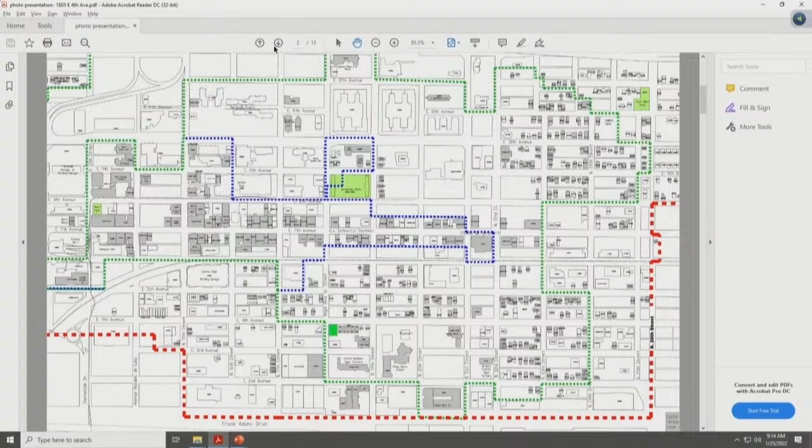Looking from above, you see the context and fabric currently there today. Just to the south is a project that's already been approved; this is kind of an amendment to what has already been approved. The subject site, once again, is on 4th Avenue and Angel Oliva Senior Street.

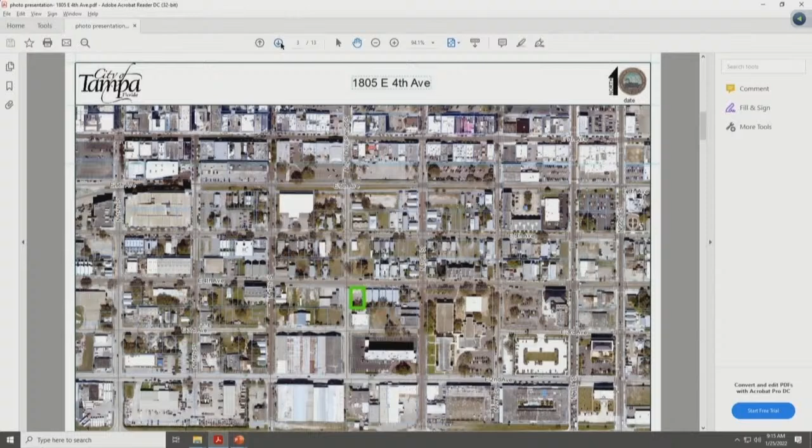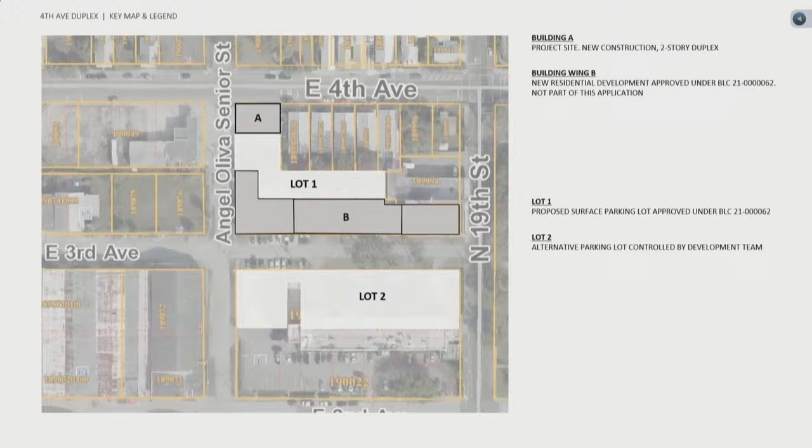Lot 1 is a proposed surface parking lot with approximately 42 parking spaces. Lot 2 is an alternate parking lot, also controlled by the development team, currently under review for a design exception, so that we are meeting our 1-to-1 parking ratios for both projects.

Here's a closer look at the development in relationship to the project that was presented last year, so you can see the relationship with that building.

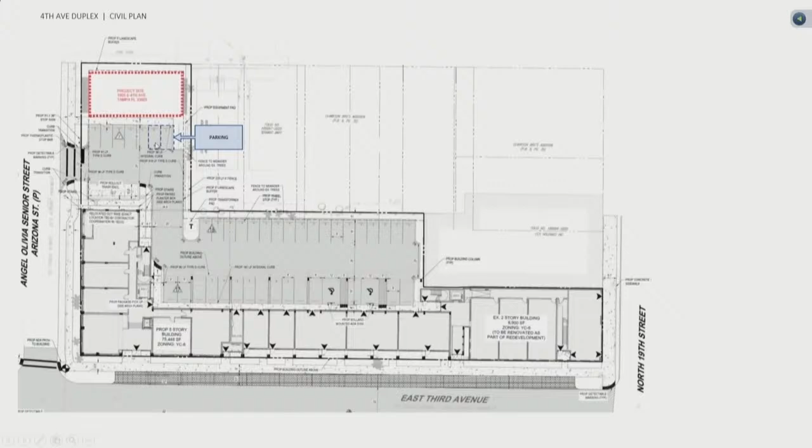We will have, as I said, a duplex, so we'll have dedicated parking, 2 parking spots for our duplex right at that location shown on the slide.

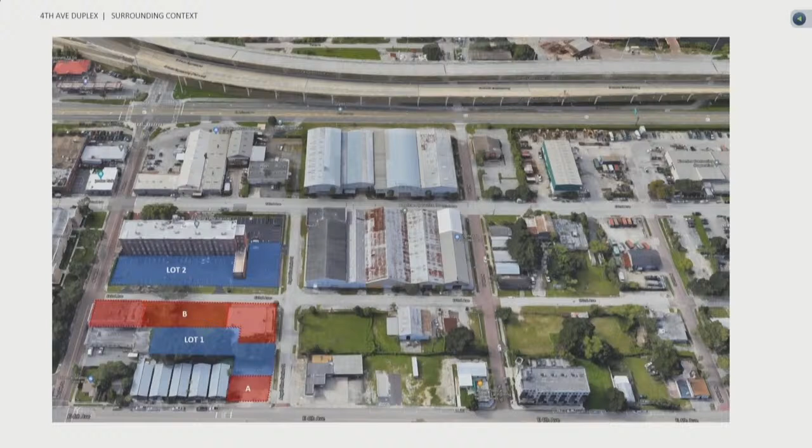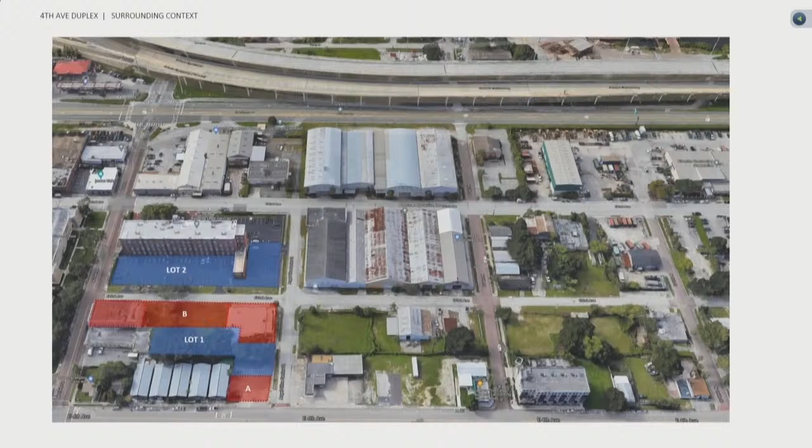Here's just a quick aerial to show the transition of scale and typologies as we move closer to 3rd Avenue. You see Building B is going to be a 5-story building. It relates to the massing already along that 3rd Avenue corridor. As we move closer to 4th Avenue, the scale starts getting reduced to a more residential scale, which is the approach we'll be taking with this project.

Here's another quick look in relationship to the buildings to the east. Our footprint is almost exactly the same as those duplexes to the east.

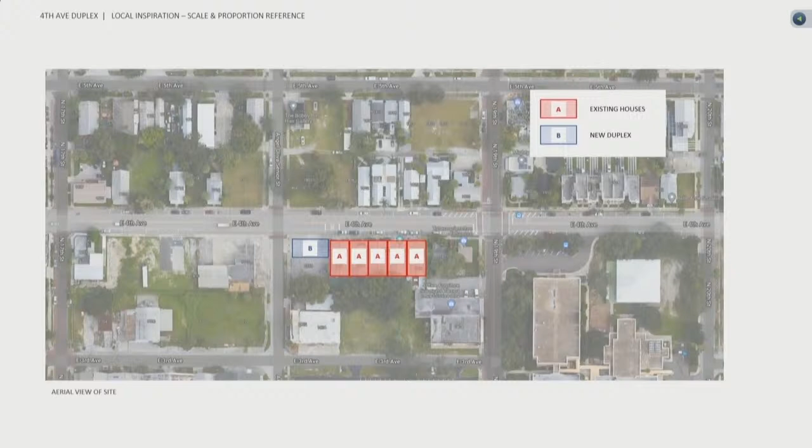We're using as reference, really our main driver for the design, the historical casitas, the cigar factory workers' houses. We're not replicating this, since we have a two-story structure, but we're definitely taking some strong cues from that historical reference, including a front porch condition, again to really activate the pedestrian experience along 4th Avenue, which is developing quite nicely.

Also along 4th Avenue, we've added two relatively new projects. At the bottom of the screen is another multifamily project just west of our property, and to the right is another townhouse project kind of catty-corner right across from our site. Although the front of that project is at a lower scale, as you move back it actually maximizes the height allowed on that street.

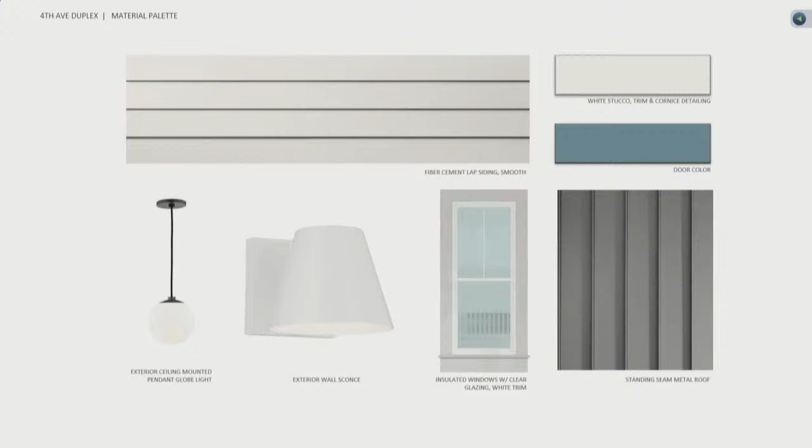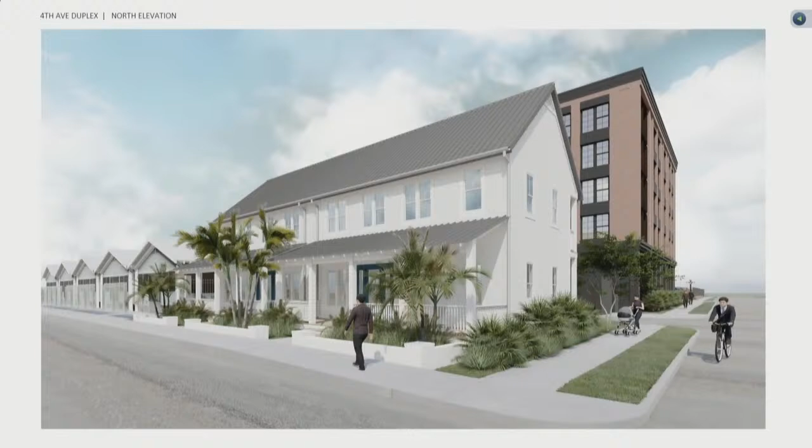And now, just renderings of what we're envisioning this project to look like. This is a view looking back at the north facade.

We're proposing to have a very low knee wall at the front to kind of differentiate the front yard. This is, again, taking cues from what is historically seen around the neighborhood.

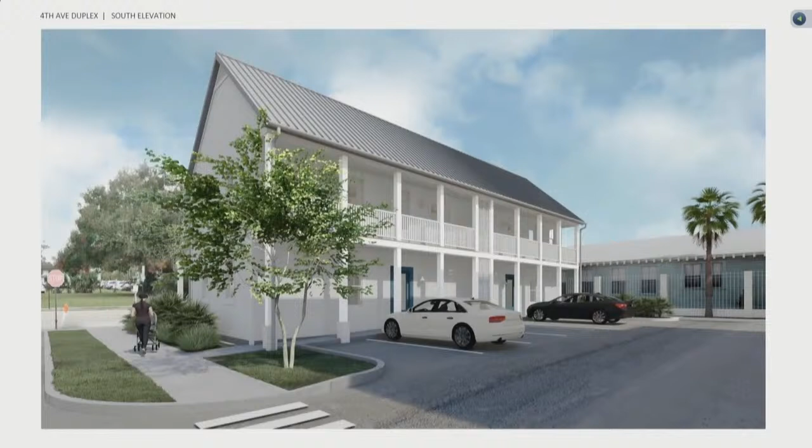Here's that rear facade. You see how, as you're walking up Angel Oliva, you really get an experience. You really get to experience that facade.

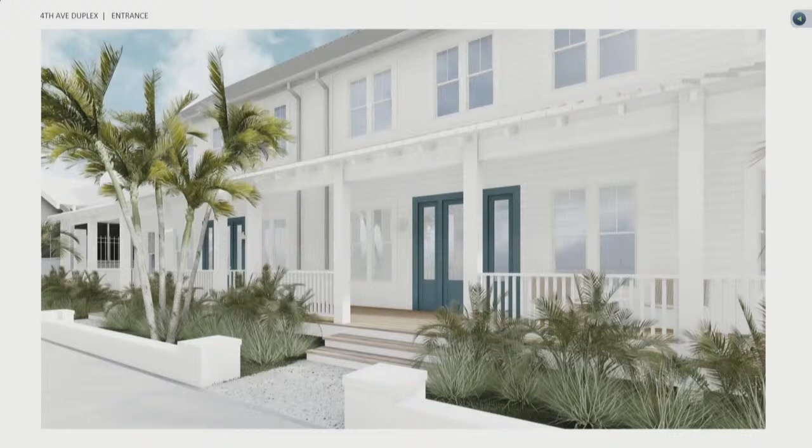There's a closer look at the front entry. We're proposing to use a shellcrete material for the entry slab as you enter into the property, to create a differentiation between the materials on the sidewalk and the materials used to enter the building.

And here's a closer look at just the experience at that front porch looking back at Fourth Avenue. And that concludes my presentation to you guys today. If there's any questions?

Good morning, Commissioners. Ron Avila, staff with Historic Preservation. The request this morning is for a certificate of appropriateness for new construction for the duplex with some site improvements.

Staff finds that this application is consistent with the Ybor City Design Guidelines, with plans that we reviewed on January 2nd. On the plans that we reviewed, there seems to be some changes illustrated this morning, but to briefly go through the conditions I had previously that are reflected on your staff report.

Additional information should be provided for elevation from grade to show consistency with the existing block, the historic fabric, and the setbacks.

Initially, the depth of the porches were not sensitive to the environment. I believe he's increased the depth of the porches, and he could illustrate the dimensions of the porches currently. The parking solution has been satisfied.

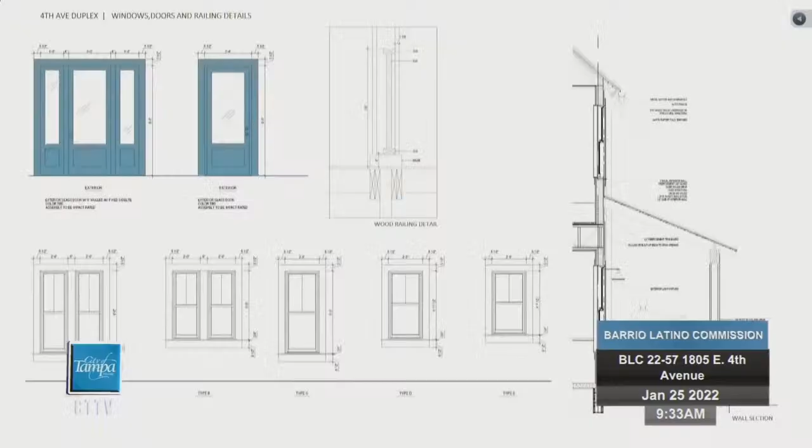One of my observations is that in the presentation, you took the orientation of the building facing west and used that roof pitch to site the building, then provided the porches off of the side that they weren't ever historically on. I was just trying to figure out if there's enough room to wrap a porch around that north-south road, similar to what you're referring to at the dog park, but it looks like you're really pressed for space there, because you've taken the entries and made them on the side of the building that wouldn't have normally had entries, right?

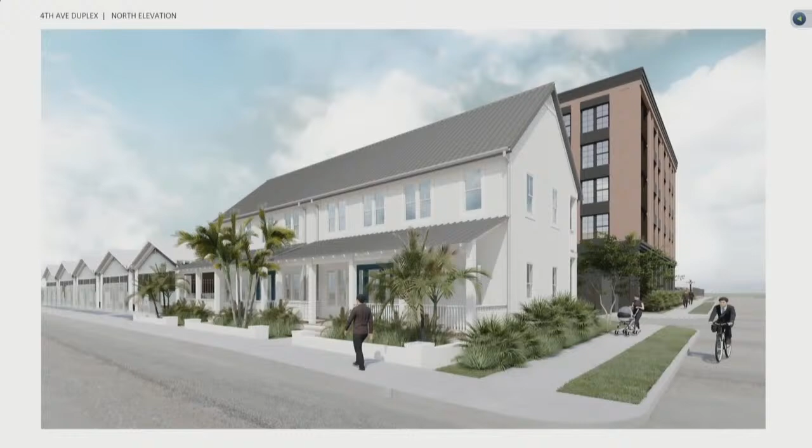No, they're the same, just the perspective view. Yeah, when you look at them in perspective versus elevation. Okay, oh sorry, not quite as different as I kind of thought. All right, so maybe I don't have any questions on the windows as much then.

But let's see, maybe come back to me then as well. I don't think I have much else. All right, so to follow up on Levy's comment about the windows, the proportions have certainly changed since the preliminary package that we saw. The double windows seem a little bit more appropriate for their scale and their massing here.

Can you talk about why we changed our rhythm here? Like on the front facade, you've got a single, it's a 1-2-2-2, and then mirrored back. I don't know if I see that being necessary - is there a distinct reason for doing that?

I don't know, it's really how the program is shaping out, so it's a direct response to what's happening inside the building, to how the floor plan is being laid out. If you look at the second level floor plan, we do have a walk-in closet in that corner. Originally we did have the same windows throughout the entire facade, but it's just how the program worked out - we couldn't properly fit the double windows at the corner.

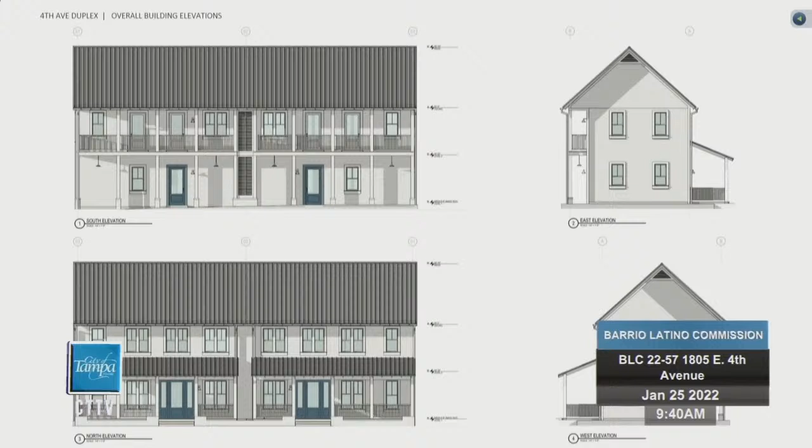So we switched back to a single window, which we thought was appropriate since as the building turns that corner, you're also going back to a single window on the west facade as well. So we placed most of the focus on trying to keep the facade as symmetrical - you see here on the west, as it turns, it goes back to a single window rather than a double window. Okay, yeah, I think that's a big improvement from the preliminaries.

I mean, I think the scale of the windows is more appropriate. I just wanted to understand if there was a particular reason for changing this, but I think it offers a nice play of the rhythm there too.

So your standing seam metal roof - Ron had mentioned that 1 inch is typically more historically compatible. Is that a 1 inch standing seam? Yeah, we didn't specifically call out what we're doing here, but we'll make sure it matches what's historically compatible here.

So the same thing goes with the sill of the windows - we'll make sure to work with Ron to adjust that to the appropriate size as well. And what are your roof slopes here? So we have a slope.

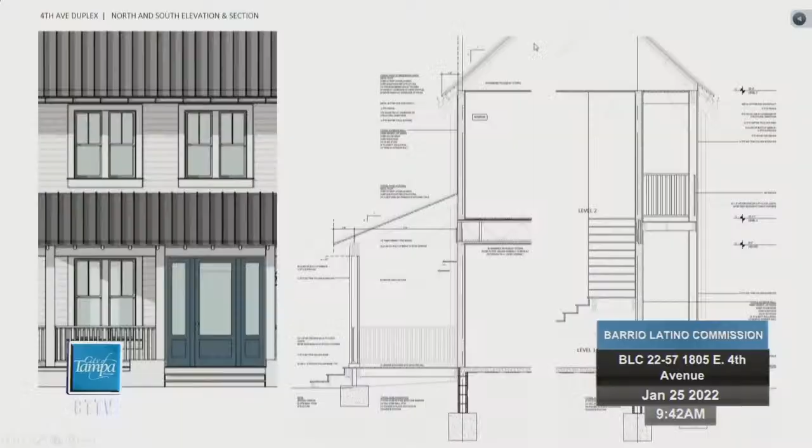It is... sorry, yeah, it's can't really see that. It's pixelated.

Yeah. And let's talk about, it looks like a stair behind on the rear elevation between the two units. What is that? This louver, it's just a louver system. Is it wood, metal? It's a wood louver system.

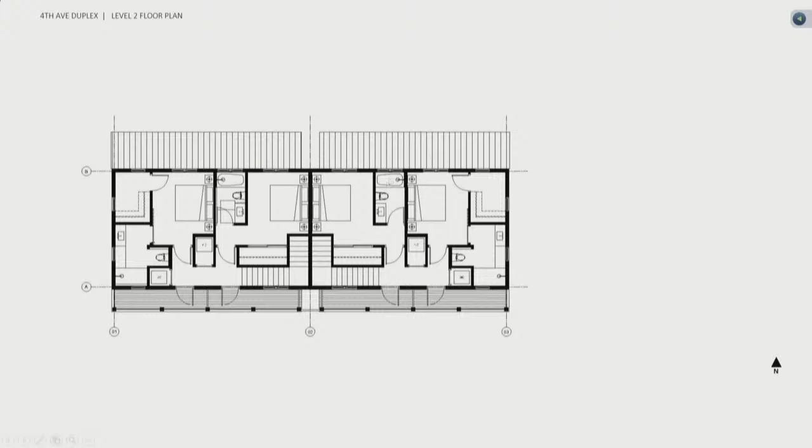Like a Bermuda shutter kind of thing? No, it'll be fixed. If you look at the second floor plan, the balconies at the second floor are also separated, so it just helps as a detail to break the length of the facade on that side. We wanted to add a detail that still allowed for breeze to come through, but somehow differentiated where the units were kind of split.

Okay, yeah, I think that's appropriate. I think these elevations have gotten better than the preliminaries that we saw. The roof mass seems rather large, and that's on Fourth Avenue. I understand the design decisions you made to rotate the building and optimize the views, and I think that's a good decision there. Was there any conversation or discussion about breaking up the continuous mass of that roof? Maybe dormers or a break?

Yeah, we definitely explored that. The first thing we tried was splitting the roof, actually creating a separation at the middle, and that really threw off the scale of the mass. It became more like two squares, which is not... we really didn't see anything that kind of related to that in the district.

We also looked along Fourth Avenue and didn't notice any buildings with dormers along Fourth, so that's another thing. And we also didn't really want to add dormers that weren't functional. So we did look at an option where we could inhabit that third floor, but again, the space inside the building didn't allow for a stair. So we explored that extensively.

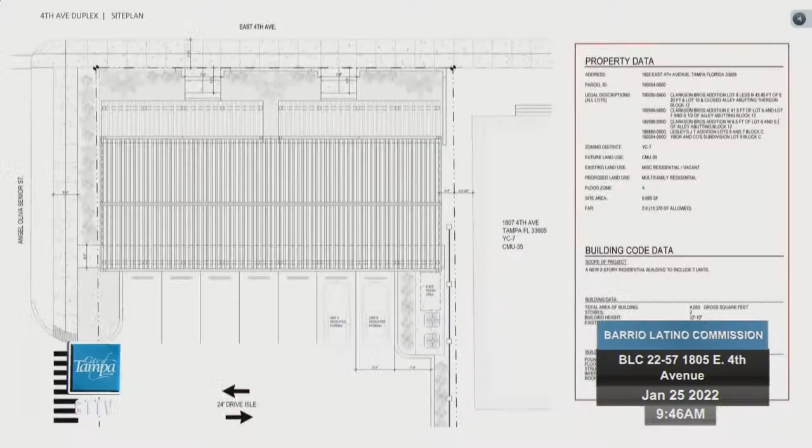What's the total length of that roof length? So the building length, I'm not sure, actually, I have a slide here for that. Ballpark? Oh, here it is, 69 feet. 70 feet, yeah, with overhangs.

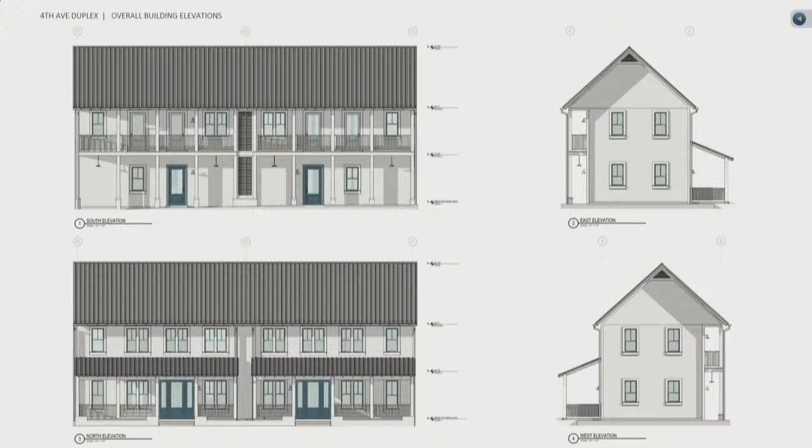Okay. Could you talk about the elevations, maybe the wall section, your front entry stoop there? How are you detailing that? Is there an approach coming down to the sidewalk? Is it a transition, or is it just kind of everything's on the building? But yeah, your wall sections are probably...

So actually, I think this shows a knee wall out front. Yeah, so we have a low knee wall at the front. I would say it's like 16 inches. The corners are pronounced. We're capping them with a concrete cap. And the steps transition outside of the building as well.

I don't know, is that the question? Was that the question? Yeah, that answered it generally. This is a good view, better than the sections, to see how that works, and I think that's an appropriate solution there.

So from this rendering, I'm seeing exposed rafter tails for the low roof, the porch. Are those appear to be exposed underneath the porch as well, but nothing exposed on the eave for the main roof? Correct. Actually, let's see if we have a good view of that. Let's go to this section.

We will have a fascia board at the eave of the roof, and they really won't be exposed at the eave since we have a very small eave at the top. So you're correct, they will be exposed at the lower roof, but not at the top.

It's just that they become kind of pixelated, so it's hard to even see that going across there. At the back, we will have a ceiling over that balcony. And the gutters are a 6-inch half round, galvanized.

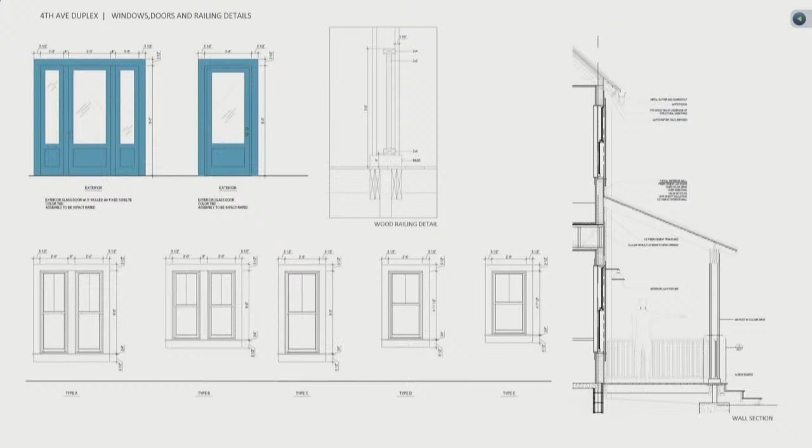Do you want to talk about your front door versus rear door? Originally we had a single door with a side light, and working with him, we figured this turned out to be a better design. So we have a 3-foot door with two side lights, just over a foot of glass, on either side. Now the rear door, since the parking's at the rear of the building, we had to also provide access at the rear just for convenience. So it's the same design as the front door, minus the side lights. If we go back to the floor plan...

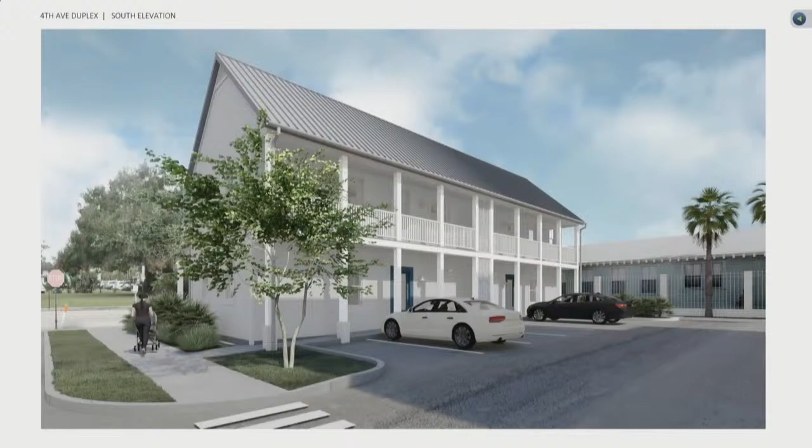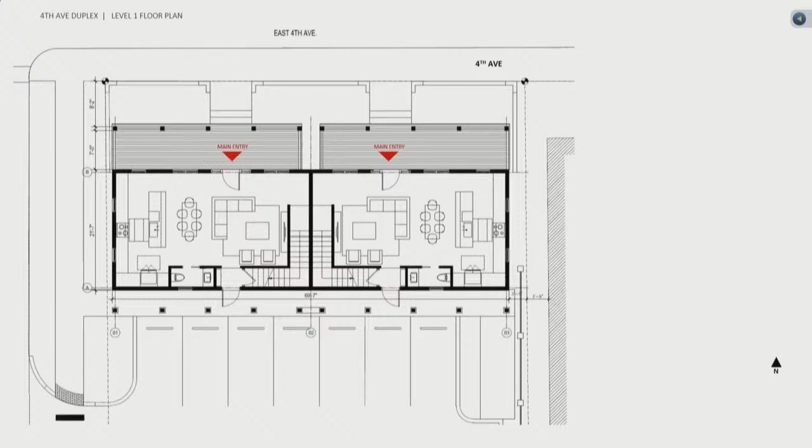Sorry, jumping back and forth here. So you have, and there's a little bit of an elevation change too at the rear, which is surprising for Florida. So we do have a little bit of a step that happens inside the building to go up into that space. But yeah, the rear door is designed to match the front door, minus the side lights, just a straight door.

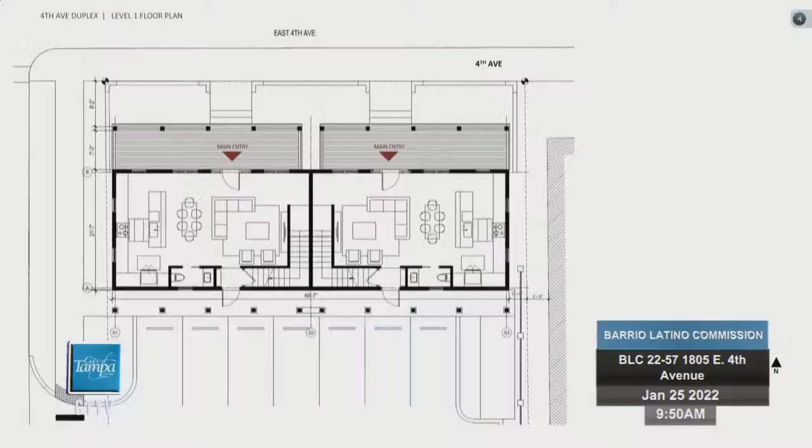We looked at introducing more windows at the rear, but really, how the program was laying out, we just couldn't find any other spots to add more windows. So you have the glass on the rear door, and a window inside the powder room, but on both sides of that you have kitchen cabinets, and on the other side you have the stairs. So it was really difficult to introduce more windows at the rear.

Could you go to the second floor plan for a second? Okay, I think your window spacing and pattern, I don't have any issues with the four windows on the east and west. I think that works really well, and I think you've made some adjustments in this presentation to the scaling and proportion of the windows, so that works very well. I don't have any other questions.

Anything else? Okay, well, I think we're done asking you questions. You have a few minutes, five minutes, for any rebuttal or summary comments on your project, on your presentation.

Thank you again for your time this morning. We're really excited about all the energy being put into this intersection, and particularly this area of the district, so we're very excited about this project as well. It's going to be a good transition into the center of the district. So again, thank you for your comments today.

Okay, with that, we're going to go ahead and close the public hearing. We can now discuss the case amongst ourselves.

Mr. Nguyen: I think it's a very nice looking project overall. I'm comfortable with having staff handle some details, like railings, standing seam heights, finalizing mullion widths and trim and all that kind of stuff. I think it will be a good looking project.

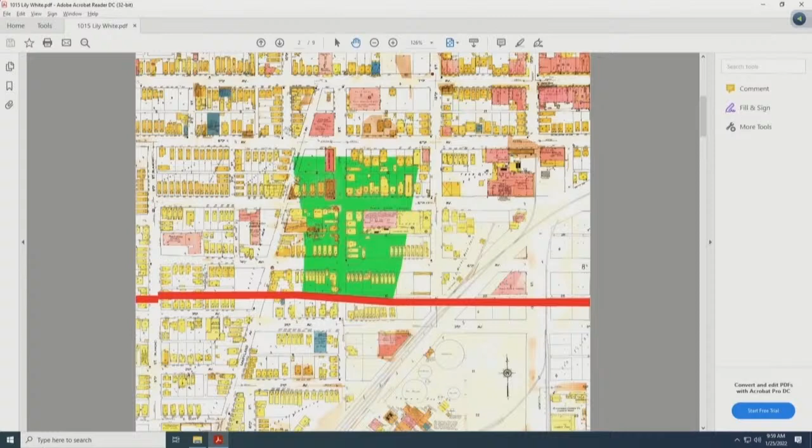This is just looking at a closer aerial of that, and this is 6th Avenue, and then it shows the fabric that was there in 1929. You see the density that was there, and it had been removed in the early 60s for the development of the projects that are there now.

Looking at the subject site, which is here, you have Lily White, and then you have Nuccio to the east. You have Scott Street to the west, as it terminates at the southern boundary of the local district.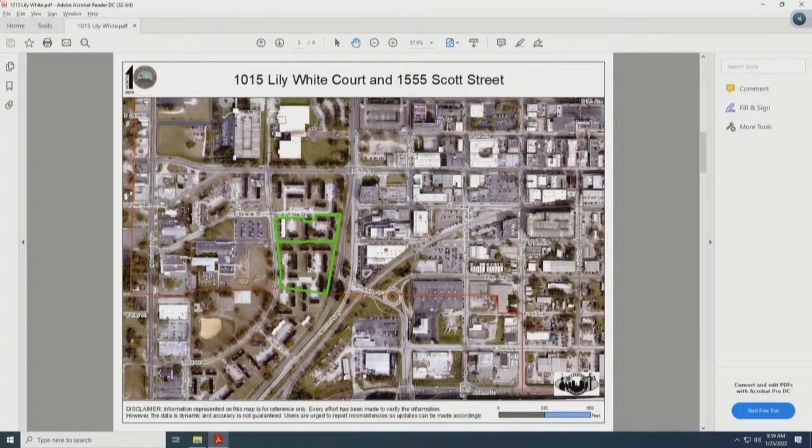Once again, looking at that subject site, just a little closer.

Moving to our vicinity map. This is a more current illustration. Here you have the series of non-contributing structures that are maintained on the subject site that will be removed as part of this request.

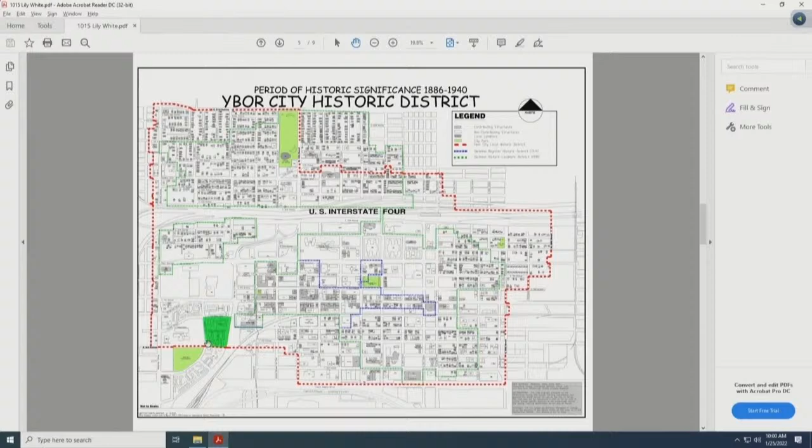And just looking at the structures that date back to 1969. There is some historic fabric in here, and that's part of the recommendation that went forward to City Council, that historic material be retained. So as they go through the process, if there's any granite curbing or bricks, it should be inventoried and discussed with staff on how that's going to be re-implemented back into the project.

And that was just additional photos of a lot more of the same. So that concludes the photo presentation at this time. Ms. Gaines will address the board.

I'd just like to make the commissioners aware that this is a preliminary approval. So staff has kind of outlined some of the required things for preliminary approval that I think are within our purview. I think we need to be very conscious of what's being looked at and approved for the preliminary, and we'll give direction for the final as well.

Good morning, everyone. Stephanie Gaines with Kurtz Gaines Hall Architects—left out a partner, Kurtz Gaines Hall Jones Architects. Michael Pilar with me, my right-hand man and everything.

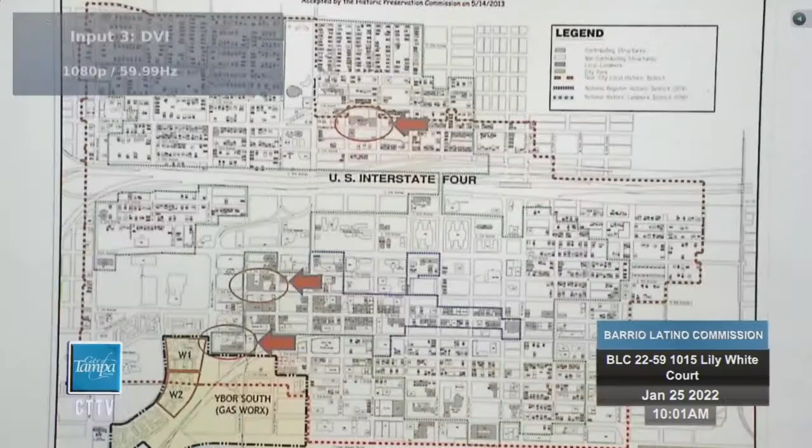I want to start by doing a little bit of orientation because there's been a lot of publicity about this project, and there's a lot of moving parts and pieces in different processes, going through different processes.

So just real quickly, this is an image from our PD package. The yellow area is generally the entire Gas Worx project, which there's been a lot of publicity about. We were here before for PD, for W1 and W2.

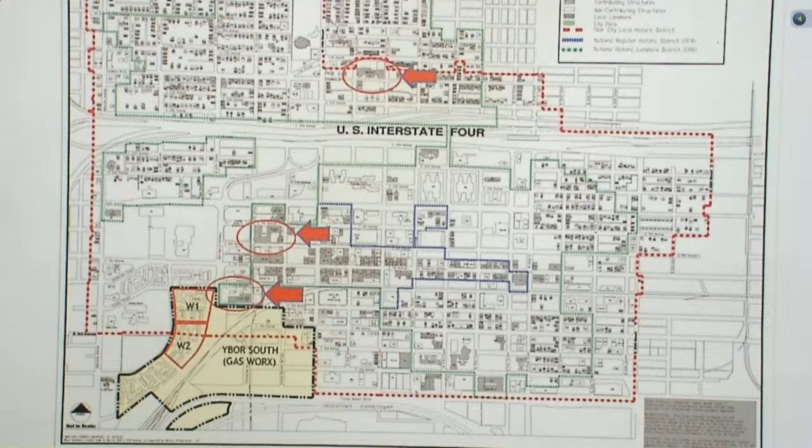We were—let me zoom into the next page. This one. This is the actual PD plan that was approved. Let's move this down. Yeah, zoom out. That's great.

The blue line—we added some lines to this PD plan—is what city council approved as the PD. The red line, the southern red line, is the historic Ybor City District boundary. And what you approved, what you reviewed and recommended, is the area that is encircled in the red line. That's the area within the historic district, so that was the portion of the PD that you approved.

And what we're here today to do is start the certificate of appropriateness review, part 4, for only one parcel, W1, which is the area shown in the black outline. There's a small portion of the southern piece, W2, that is within the district, but it's a separate project, separate timeline, separate architect, so we're just doing the northern part, in case there's some confusion as you go along.

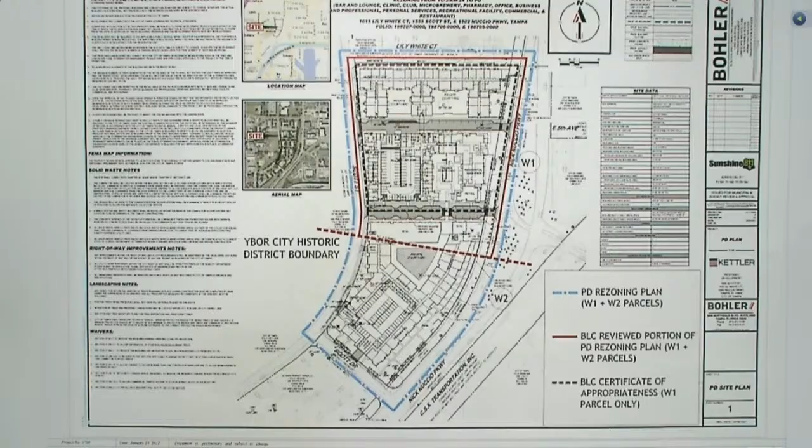So going into the enlarged site plan for those 2 blocks—it's 2 blocks because we're starting with our development—and I'm going to review this quickly because this is all part of the PD, but I'm not sure if everyone was there, and there's a lot going on, so we're going to go through it quickly.

This is the W1. We are starting with trying to mend the urban fabric by rebuilding Fifth Avenue and 4th Avenue, which align with those same roads on the east of Nick Nuccio Parkway.

We are working with the conditions that we have around the property regarding setbacks. The northern parcel is privately owned. We would hope that owner would rebuild 6th Avenue to follow suit, but there's no commitment to that. So we've shown a minimal setback there. That setback, while larger than zero, is pushed back because of a water main easement we have there—between 8 and 12 feet from that property line.

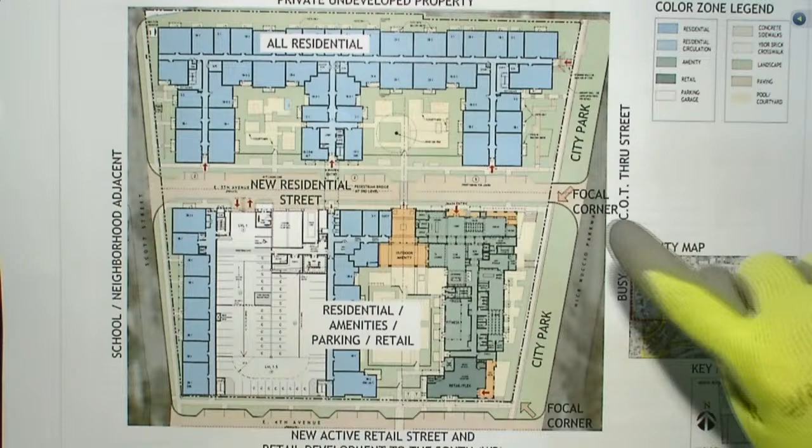We also have steps—on the north building. In order to get up to the buildings, we need some space for steps, so we've allowed for that area there.

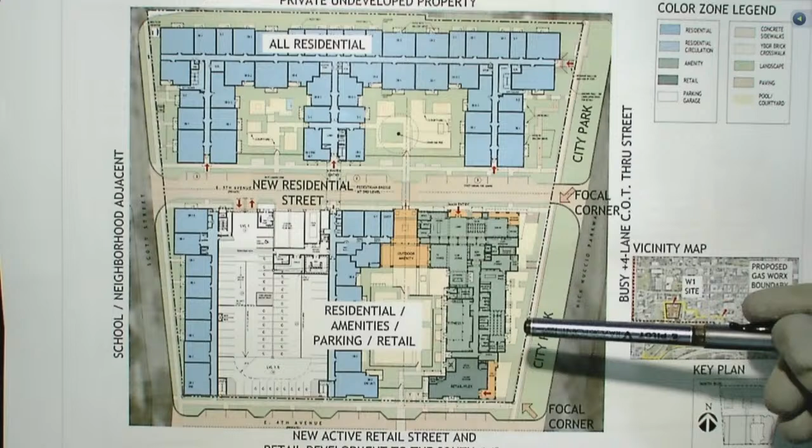And then down on the south building, we've got outdoor public areas. That dark green area is most of our amenities, our leasing office, and that sort of thing. So we've got that corner entry at the north of that south building, and the light pale areas are outdoor social areas. I'll show you something on the next page when we get to it.

Just to identify, the entire north building is residential use, and it's carved in with courtyards to create views and break down the massing. The southern building, on the first floor, has most of the semi-public amenity areas along Nick Nuccio. Then the parking for the entire project, both buildings, is flanked by more residential units on the left and the right, overlooking an interior primary courtyard.

Sticking with that Nick Nuccio area, before we get into the vertical elements, I think this is something for everybody to understand. This is a drawing by the landscape architects we're working with, Sasaki. It shows a little bit more about the uses along Nick Nuccio and that green area, leasing area there at the corner of the south building. There's a retail area at the southern end.

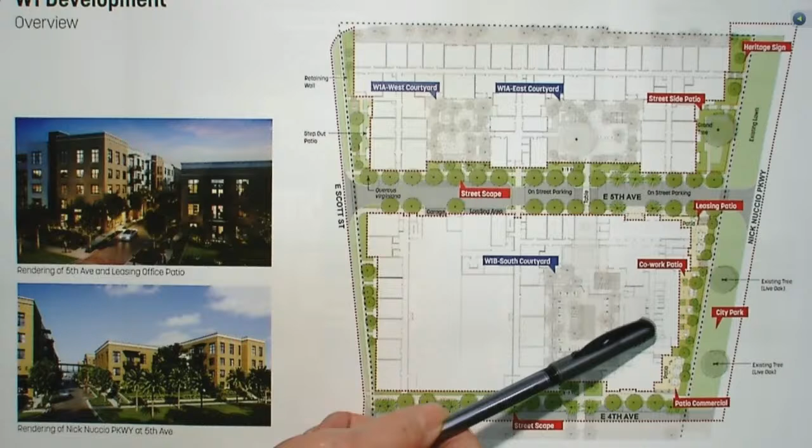So this is a public outdoor area. This area in between is social and home office areas that have spill-out patios along that area too. And then on the north, we have a little private green space around the oak tree and our entrances into that.

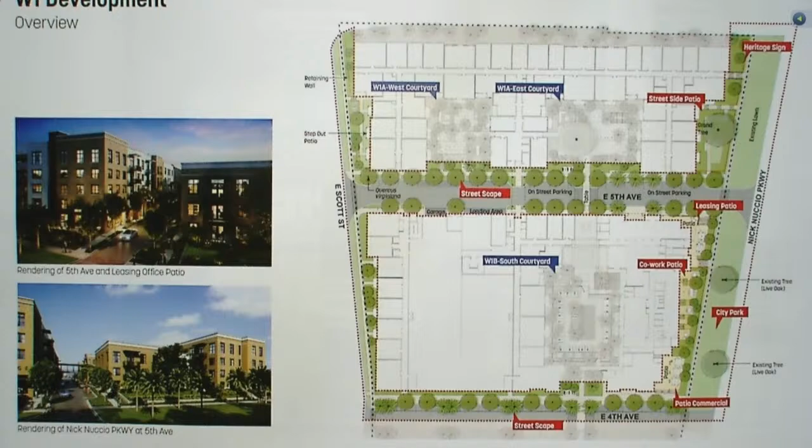You can see from the renderings, although they're pretty dark, we are starting to solve the problem of grading with low walls that can typically be found, so that we don't have a sheer 6 foot, 8 foot wall. We've started with a 2 foot low wall and then gentle grading up. There's a picture of that oak tree we're talking about, with a little bit more detail. We've kind of seen it all, but let's zip through again—this shows a little more detail of the southern piece where those outdoor areas are created.

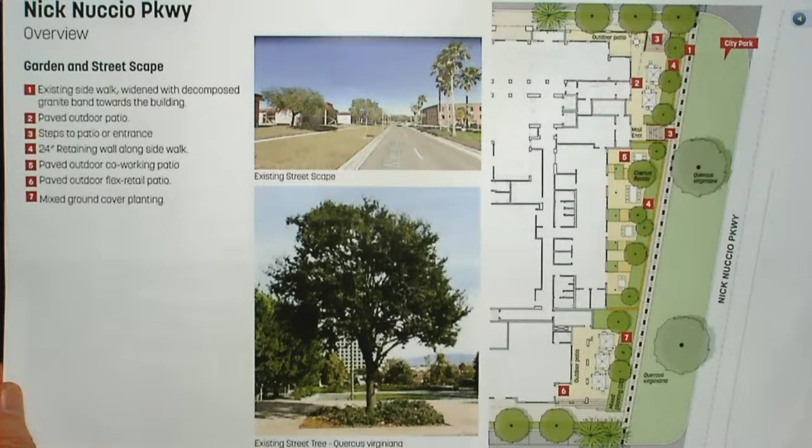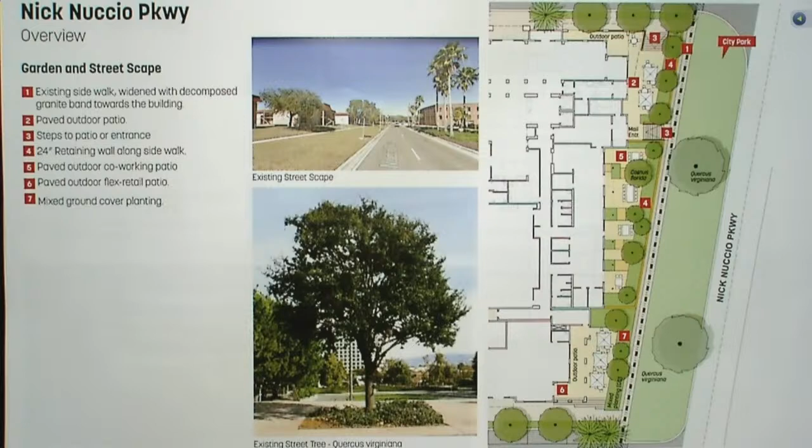This wall, a little hard to see but it is shown, continues through the north and south parcel. It creates a geometry that follows the property line and creates an edge while the building steps in and out in straight lines that we follow at an angular line. You can see in the photograph, our site is on the left, and it's hard to see that there is that much of a grade change, but across the entire property from Scott Street to Nick Nuccio is a 10-foot grade change.

This is just a little bit of detail on how we're handling that area. Sections down on the bottom, cutting through a planted area with a 24-inch wall, and then the grading up to the outdoor patios, and then a section through a typical stairway that would go up to that. The low walls—just considering some options there.

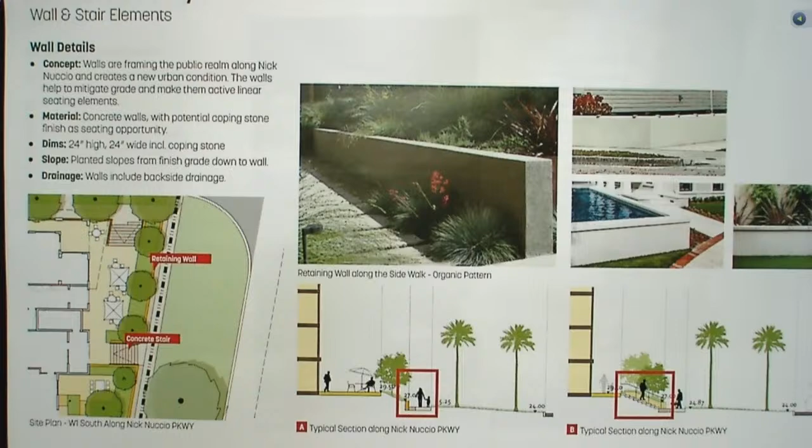These all attempt to blend that grade change so that we don't, again, look like we're sitting on a mountain.

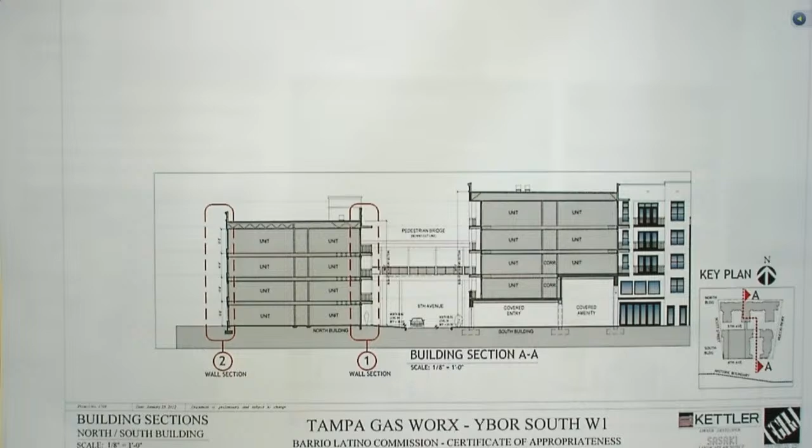Now we're going to move into the building sections and details quickly. As already mentioned, through the PD process we understand, working with staff, that a lot of the site issues have been dealt with: orientation, massing, those sorts of things, except for the conditions put on the recommendation. So the next thing for us to do is look at architectural and site details, features, specific materials and colors. That's the start of this process.

This is a section, can you see the key plan? Yeah, the key plan is there on the right bottom corner. This is a building section through the north building on the left and the south building on the right.

It shows that pedestrian bridge, which I haven't mentioned today, but that goes across that private new street, Fifth Avenue, to allow residents in the north building safe and secure access to the parking garage, which is entirely located on the southern portion of the property. So it's a 4-story building on the left, 5-story building on the south. Those open areas below are just where we've cut through the building through the outdoor amenity areas that would join into the pool on the right-hand side.

Couple more building sections. Again, the key plan down on the right. Can you zoom out a little more or pull it down? There you go. So on the upper section from the right to the left, I'll go with this.

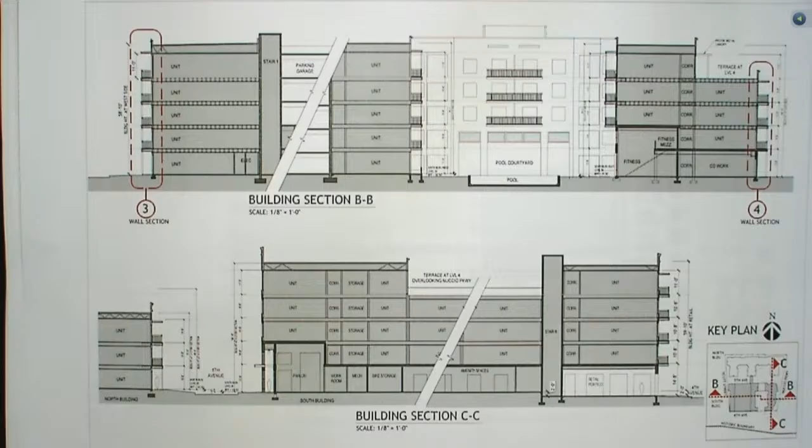Okay, why don't you put that up on the thing. Sorry, get the board and put that up. So we have a sheet with all of the building elevations on it. Sorry, just one second, and give these out to everyone.

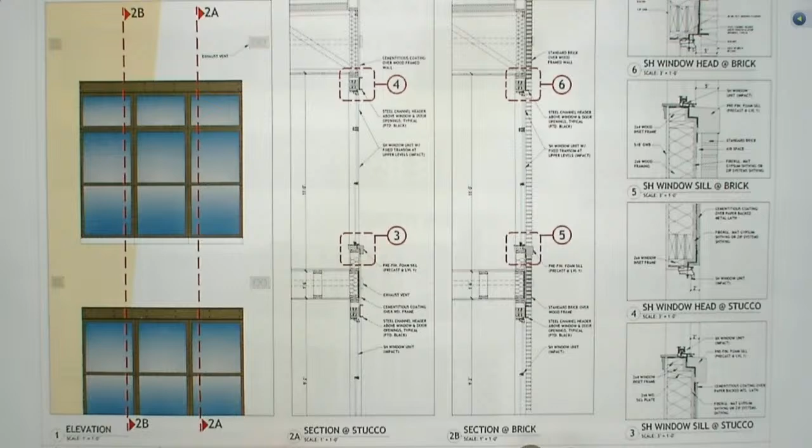So first of all, we have window details. These are typical details, with a blow-up elevation, then wall section size details to the left, one shown in stucco, one shown in brick, and enlarged details of the head and sill of both of those conditions.

It's a wood frame structure. Part of it is covered in stucco and the other part in brick, which is why we have both of those details. There are precast window sills at the first floor, and then we're using foam above the first floor where it can't be accessed or seen as well.

We've got a detail at the top windowsill and at the top of the window head, which is a C-channel steel. It's not really functional, it's just a decorative piece, but it's carried from elements we find in Ybor on some of the more modern buildings.

Do you have the other board we can put up with those? Without showing you all these individually, you can get the other easel maybe and do it over here. Michael, just put it over there so they can have both up.

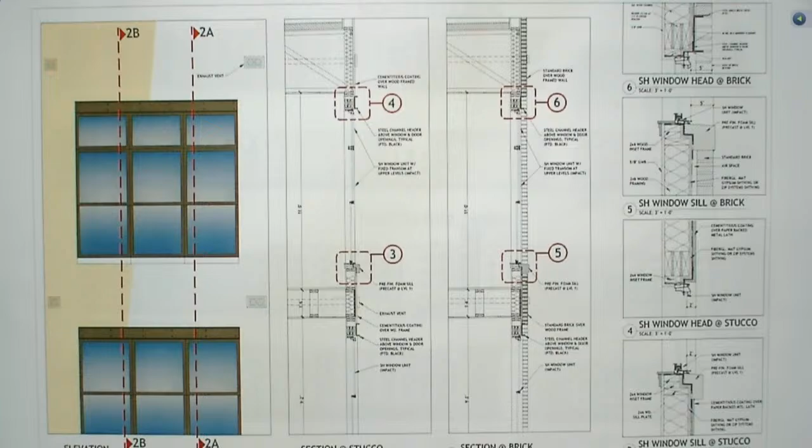We just put all the historic references for various components, which we reviewed a bunch of in our PD package, but we wanted you to have those for reference. You'll see a lot of different elements there, which we can address in the question period if you'd like. I'm trying to go through quickly, hopefully not too quickly, with lots of time for questions.

The next detail is a typical canopy detail, seen throughout Ybor and on new construction as well. Again, these are all faced in steel, another C-channel in the detail here. These are throughout the project, but this is just one example between windows and doors to cover the door head.

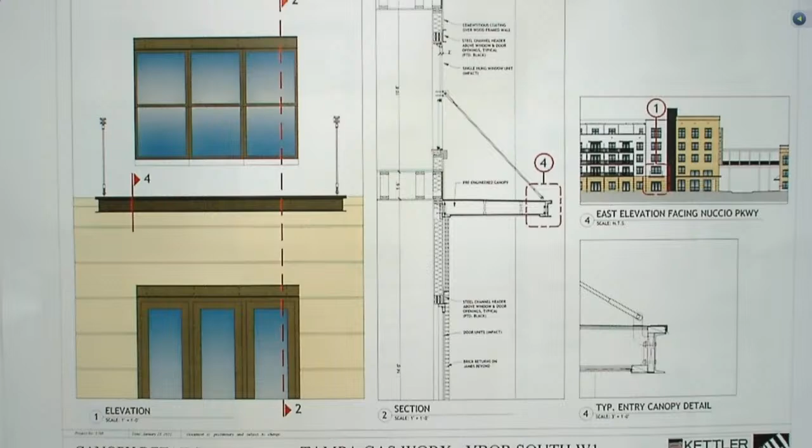They're connected to the building with a turnbuckle or a fixed steel rod, just like everywhere. These are solid components. Some buildings have sunscreens, but these are solid in this particular case.

And then there's typical balcony detail. We've used the proportions you would see throughout Ybor, where the lower level seems to be much higher because the lowest level of most buildings, especially along 7th, have a much taller ceiling. But anyway, those are round steel posts that support the balcony with a standard double top rail painted aluminum railing.

And here is where you can see the gridding on the brick. These are, we'll show you in another drawing, actually recessed bricks every 2 feet on center, just to give more of a rusticated base. Some examples of that you can see on the board.

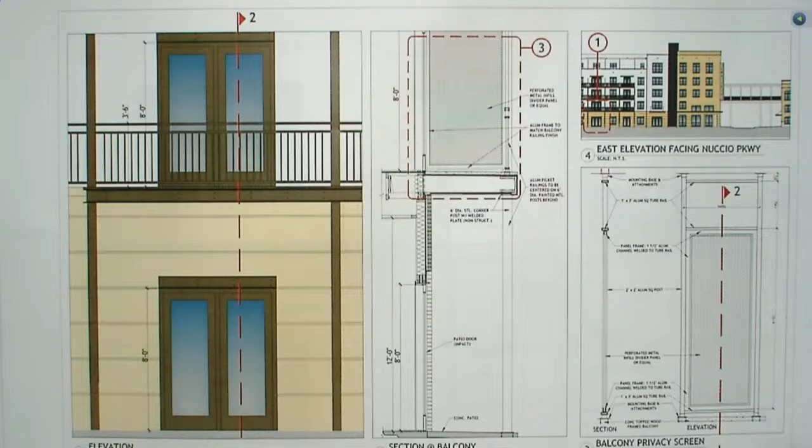For the dividers between the units, we are currently showing a metal frame similar to those used on the Mill House project. Here we're currently showing a perforated metal panel for those, but are exploring lots of different materials. This is a section through part of the entry system, just to show that roof overhang that's kind of hard to see on the plan.

And brick columns there. We've got exposed beams tying back to the structural wall at that lower level, really trying to create a tall colonnade. This is the narrowest part, about 6 feet, and then it gets to be about 12 feet at the corner. So there'll be a lot of shadow play happening at that corner entry.

Storefront fixed below and above.

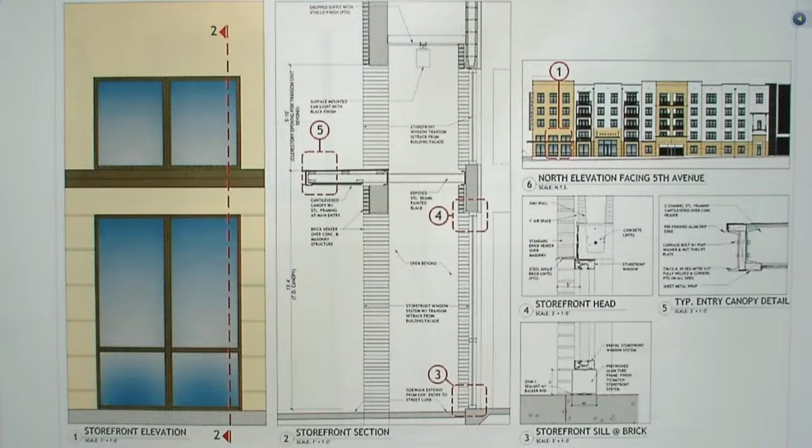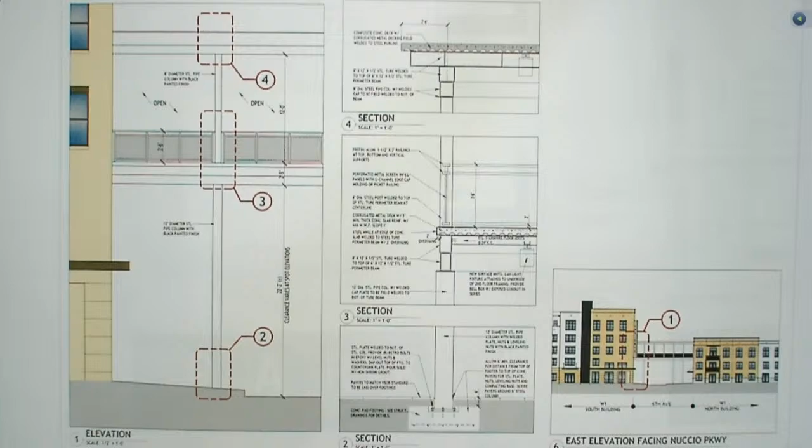At worst case scenario, there's only about a 30-foot unsupported span, so we're hoping for something fairly thin. It's got a flat roof and typical railing. We may use a special kind of perforated metal railing again, just to give it more of a sense of enclosure than just open pickets. Again, that's still being played with.

We're just showing you one of the entries. This one happens to be at the Nuccio end of the north building, trying to be reminiscent of the Martinez cigar factory, small little entries. It's all metal covered, and our steps in that location will be in a U shape like we've shown, and it'll have a similar canopy over it like all the other canopies on the project.

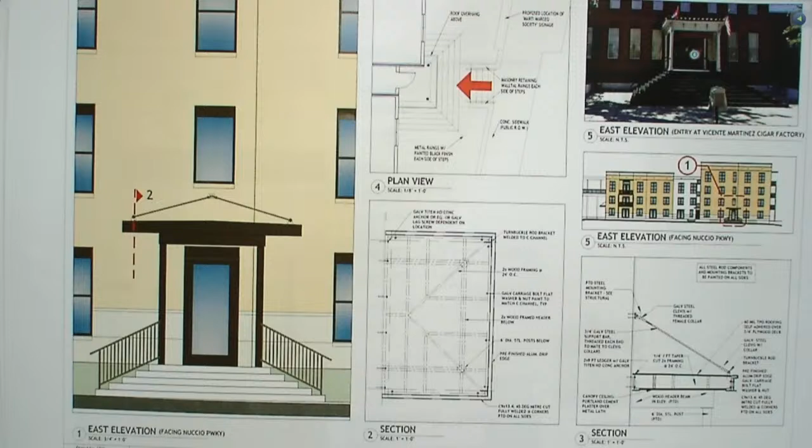The directions were to show wall sections last, so we pulled those out and we'll just do that real quickly. I'm not sure if you're going to be able to catch it all. Are you zoomed out? Okay.

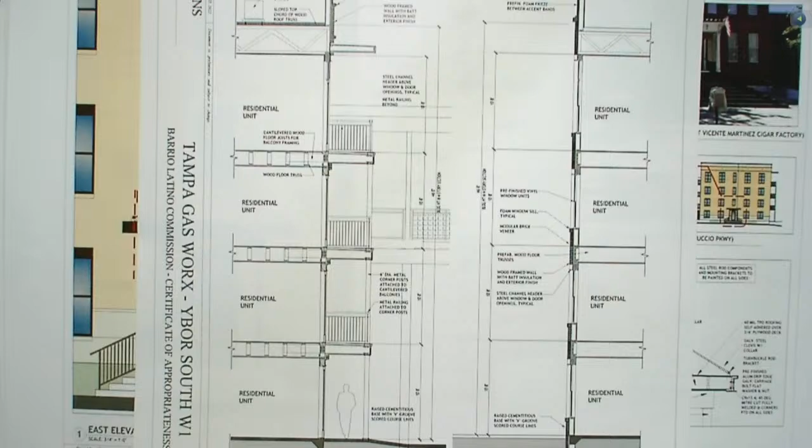We are working with the building department, and they have agreed to let us drop that so that we're not further taller than the grade change we have. So we're down at about the height of Scott Street now, and those measurements are taken from that base flood elevation. Essentially, the 3-story sections are at 35 feet, the 4-story sections at 46 feet, and the 5-story sections are at 58, almost 59 feet.

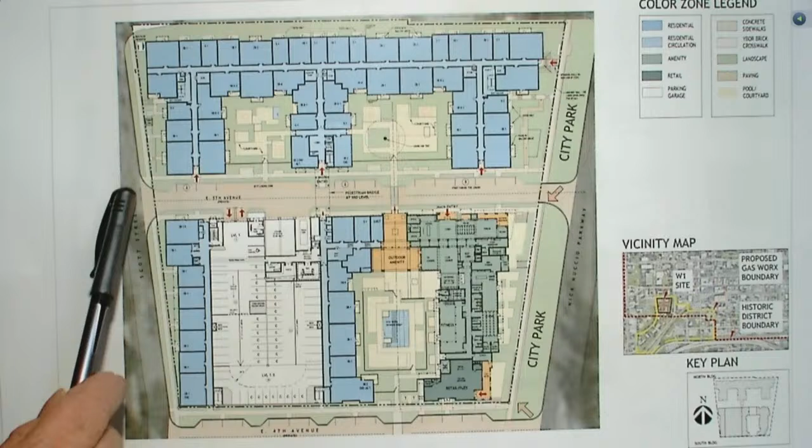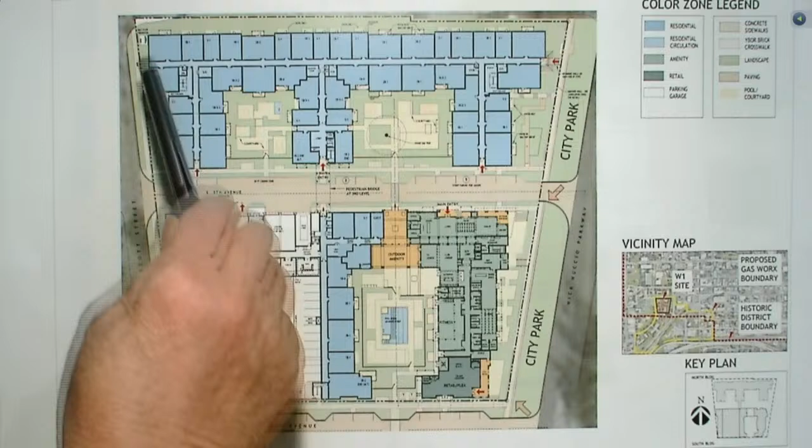As the building heads south—let's show them this plan again—this footprint is at a 30.5 elevation, which is essentially what Scott Street is, and so is this portion of the southern building. At this point, this section of the building drops down a foot to 29.5, and then this retail corner, because the property is sloping this way—I'm not sure how that looks on camera—but from this corner to this corner, this elevation is down at 27.5, but the floor lines remain the same. I'm not sure if I did that very eloquently.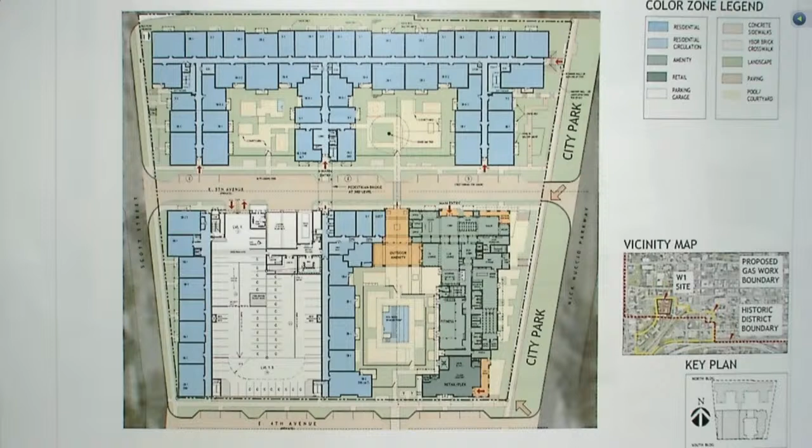So we showed you a lot of things quickly. We did not show you anything about lighting, signage, or plantings, and we really didn't bring any actual samples to talk about specific materials—we only discussed materials and colors generically. So we would love if you could craft your motion to either exclude or include components that we did or didn't cover well enough. That way, when we come back, we're all just looking at the new things that need to be covered and not repeating things already done. This is a big project and we have to chop away at it.

That concludes my presentation.

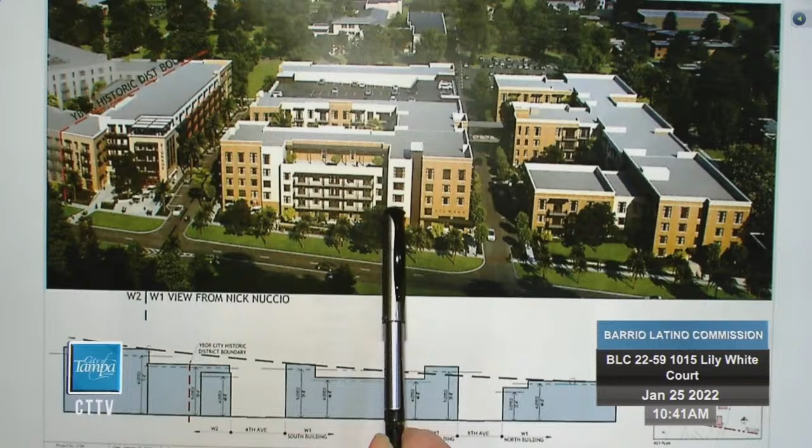Are you talking about this? Yeah, that's stucco. And then the base of the entire building, all 4 sides, is brick. And then for your vertical stairways and elevators, you're using a darker brick - yes, a darker, kind of gray-black, although the colors are hard to get right since every printer comes out differently, but yes, we're accenting those stair towers.

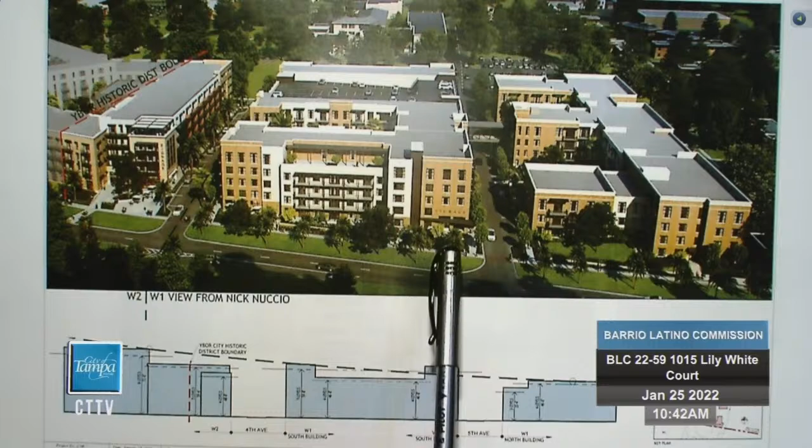Only one here on the front, we've concealed the other one to bring importance to this corner. And then there are those elements that flank the sides of the parking garage. I can walk through those elevations with you.

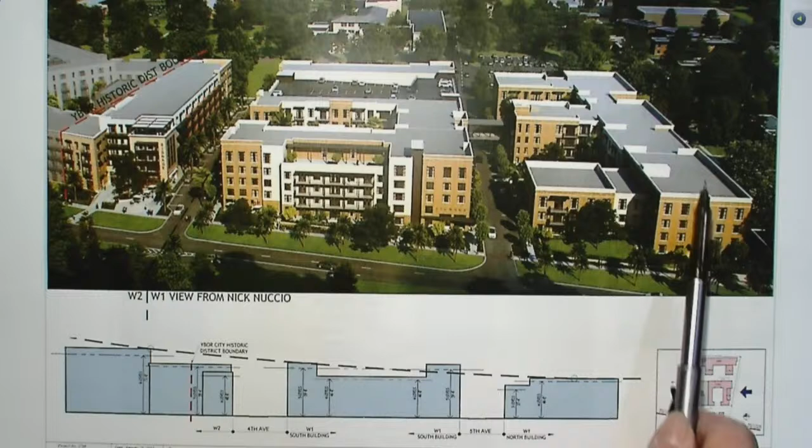And then the heights again: the 3-story sections are about 35 feet. The 4-story sections, which are throughout this building and in this section of the south building, are at 46 feet. And then the 5-story sections are at roughly 58'10", so between 58'10" and 59'10".

Again, this is showing something flat, but the ground is actually doing something a little different. So depending on where you measure, there's a 2-foot change in first floor elevation from this corner to this corner. So what we did was just make that retail space have a 2-foot taller ceiling by dropping it down.

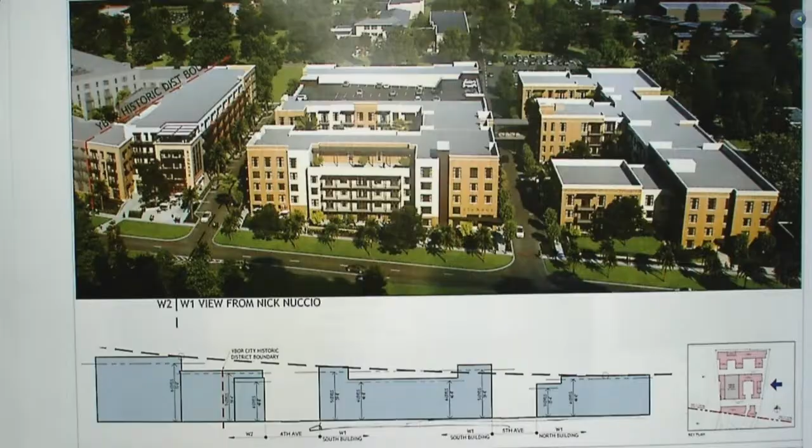So that your 5-story buildings are 58 feet plus or minus? Yeah. Okay, I saw they're below somewhere around 60. Yeah, and I saw someplace that was 72 feet, one of the wall sections in our preliminary packet. I'm not sure if that's right, we need to fix that. I don't know where 72 feet would be.

I'm not sure where. It might have been measured to a parapet, or it might be measured to the top of a stair or something. Okay, so you'll have certain pop-ups that exceed that, basically, that don't count for your roof level. That's right, by code we are allowed to have some areas that pop up, but they'll be minimal.

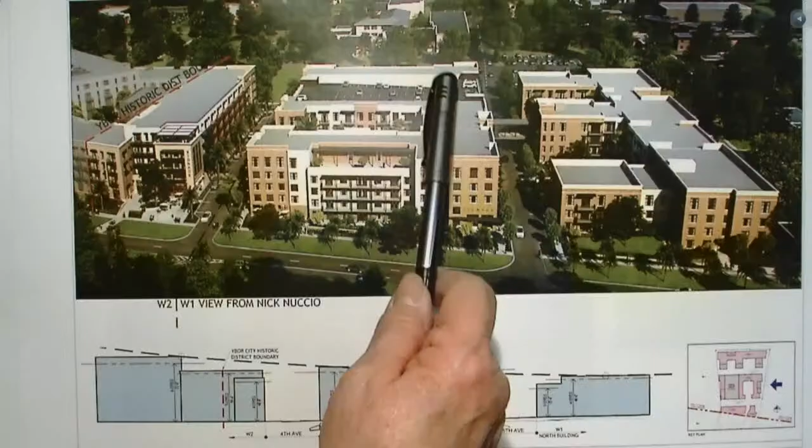And on your view here, the parking garage is completely behind parapet walls? It is behind, it's concealed this way. And on the elevations, you do see the short ends of the building on the south and the north. And you said in your presentation that those are the same materials, the garage screening on both the south and the north? Yes. Enclosed - I shouldn't say enclosed, this side is a part of the garage.

These are solid stucco columns between this open mesh, and the mesh, depending on the size of the openings you have, can be very transparent or not very transparent. On the last project we did, I think the mesh used was too little and it was too transparent. And so we're learning.

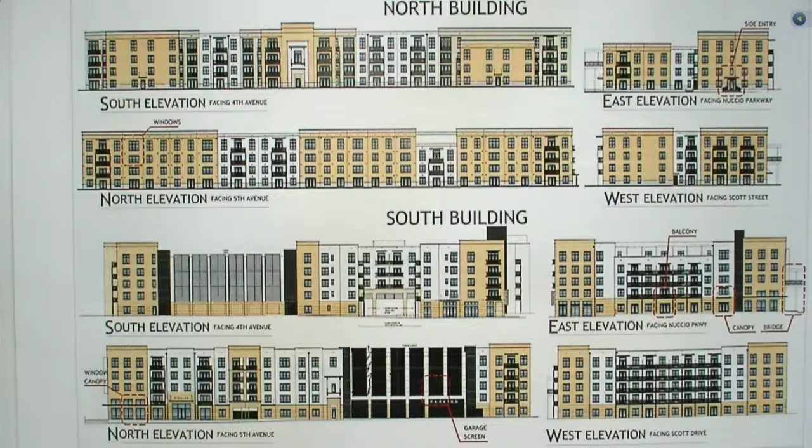But we give you an idea of what we want to use there, but there are so many choices in that arena that we want to be able to have time to look at that with staff before we present again to you.

Okay, and your parking garage is flush with the street edge there, with the sides of the buildings? It's not inset at all? Essentially, yes. Now that's just based on - this is certainly not the first layout we did on the project, we had it turned different ways, but this one seemed to allow us to conceal and provide most parking and conceal as much as we could.

There's a magic to it - the parking garage is sloped, the drive lanes are all sloped, you park on slopes. And there's a magic length of the building to get that slope to work out. So that is what the length of the building is based on, and that's why it goes edge to edge.

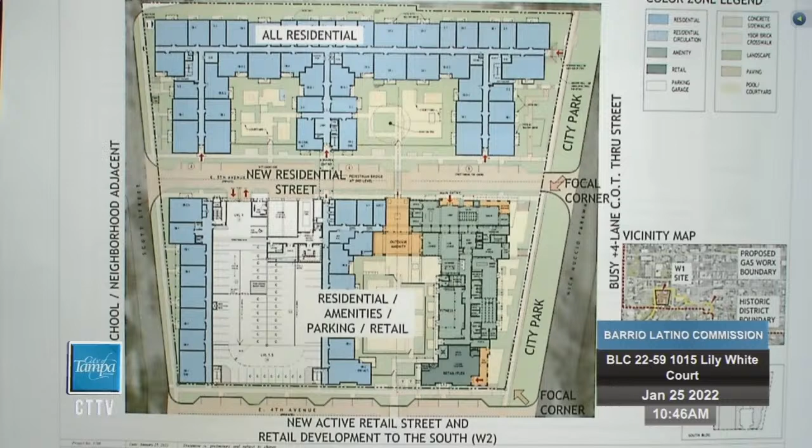We would have preferred to line the whole thing up, all 4 sides, but we couldn't get our parking in if we did that, or it would be 12 stories tall - 12 stories. I think you made a lot of good moves all the way around the perimeter of the buildings, undulating that edge in every location except for the parking garage. So everywhere else you have parks inset in here between the buildings, you break up the massing of the building so the teeth stick out and gauge that, I guess, on Fifth Avenue, right?

Yeah. And you do the same thing on Fourth Avenue on the south side, except for the parking garage. So there's a nice entry there to the courtyard, nice undulation, breaking up the massing, which is in a more respective scale to Ybor City, as you know, and like a lot of your historic examples that you've shown. But I guess I just kind of struggle with that parking garage coming out all the way to that street edge.

This is a pedestrian street edge - it's the vehicular front entrance, if you will, for coming in from the west. I'd like to see maybe if there's some way to set that back a little bit. It might not need to be a full move, but at least undulate that like you've done everywhere else on the project too. So I think that's worth exploring.

All right, okay. And I know you have magic numbers, but on both directions? No, yeah, you know, sure. No, we appreciate the comment, and we can certainly look at how we can address that.

I'm gonna send it on to John here in a minute. I like what you're doing with the grading on the east side here. I think that works pretty well.

Can you discuss the pedestrian bridge, the materiality there? You said it's gonna be a steel structure, and it's covered. Is that like a standing seam metal roof, or a 5V crimp, or is it a flat roof? Okay, it's a flat roof. What's the material? A TPO or modified kind of roof would work.

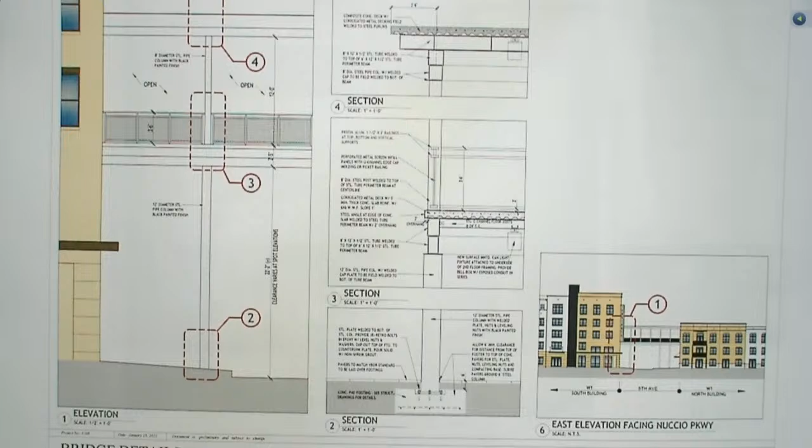I know you're trying to downplay it, but it might be a better use of staying with your metal palette there instead of introducing something else, because it looks like just metal deck and some insulation on top. So I think you should express the materiality there. I think your historic precedents that you set on this board would lead you there - same language that you're using for your awnings and your other steel structures.

Yeah, sure, that would be beneficial. I got you.

Okay, thank you. I appreciate the recap and all of the effort and intensity that's gone into the project thus far.

With that said, at this point, as we transition from the PD level analysis and approval, and proof of concept that this all works, into what we'll need for final approval, the contrast between the plain flat elevations you have there and the three-dimensional versions is stark.

With the 2D elevations, it's overwhelming in a way that's not easy to engage. It makes it very difficult to engage the project. The 3D versions of what you have are much more engaging, and I think that's what we'll need to see a lot more of moving forward.

Because when I look at the 2D versions, I think that's a lot of the same color. I don't understand what you're going for.

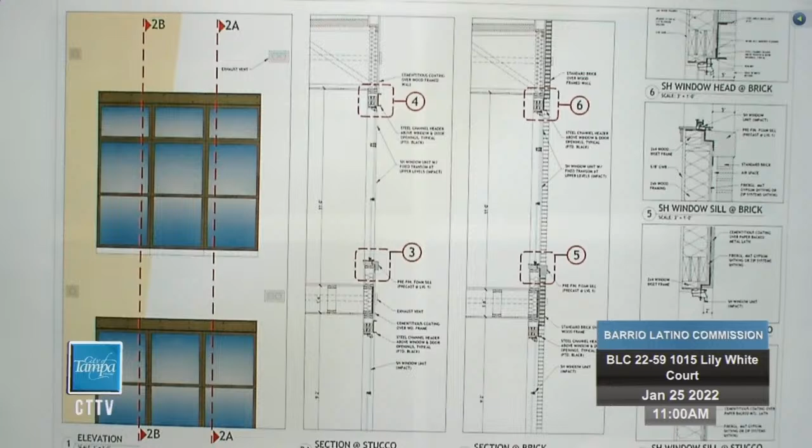But we may be showing that as metal. I think that's going to stick out from the building, so we need to modify that probably, just to be something flat there, if there is something there. So here you show the steel over there, but you don't show it in the detail, so - detail number 4. Oh, yeah, see, so I don't know. Copy paste.

And I think steel is appropriate there, or if you need to do it out of stucco thickened edge or something, that's probably appropriate too.

And thank you for clarifying the heights and the materials. I think we're all trying to get our heads around it. It's a lot to put into one presentation when you're not dealing with it day in, day out.

And I think one of the aluminum or steel canopy details over one of the doors, at one of the entry doors, you showed two tie rods going back to one location. I don't know if you really want to do that, it's... when it goes into one point, that's kind of the cigar factory one.

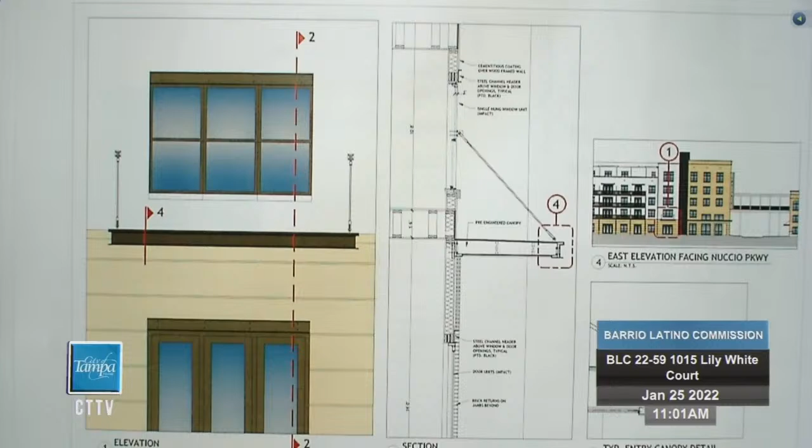I think you probably want to straighten those up and keep them parallel. Well, we were trying to do something cute right there. The actual roof is supported by columns, so we were just looking at mimicking maybe a roof that you would see on a cigar factory, but it may not be as strong.

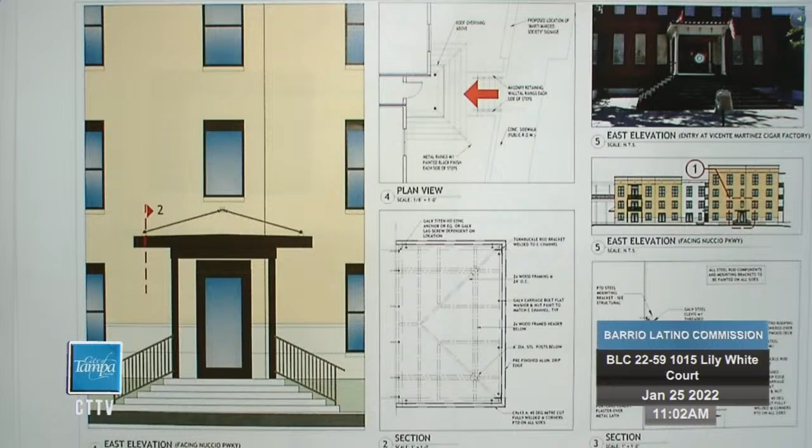To footnote off what we mentioned before, this is one of the conditions that caught my eye during your presentation as something that was not appropriate that we'd need to talk about, but I have no idea where it is. It'd be good to see what this one is compared to the other, because as a single sheet there's lots to talk about just here. Right, and probably got 35 of those types of different details throughout the project that we need to consider.

So that goes back to my point, bring all the special moments you want to talk about and how they're detailed, so we can just run through them.

Yeah, no, I'm with you on that one. You know, there's two different things - you don't need the tie rods there because it's supported by the structure, but I don't think that's as appropriate for having the columns in that particular location either. It's your design, but I think you guys detail out a lot of these plans with key plans and show where things are.

Maybe just during your presentation call that out a little bit. Okay, we're on this elevation on the north block, and this is our entry element. I know you have limited time, but we'll give you plenty of time, so you'd rather have simplified information of detailed areas as we go along.

But I think this is excellent progress. It's good to see all the progress and the design efforts here. So I think you're going in the right direction.